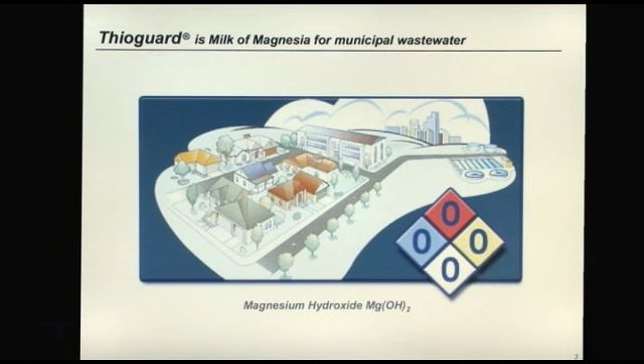The total system treatment concept grew out of the use of magnesium hydroxide for nitrification, when it was found that when added to collection, it could permeate through the system and provide benefits at each step along the way. As a consequence, Thioguard controls odor, corrosion, and fog while improving treatment. This section will deal with its reduction of corrosion systemically.

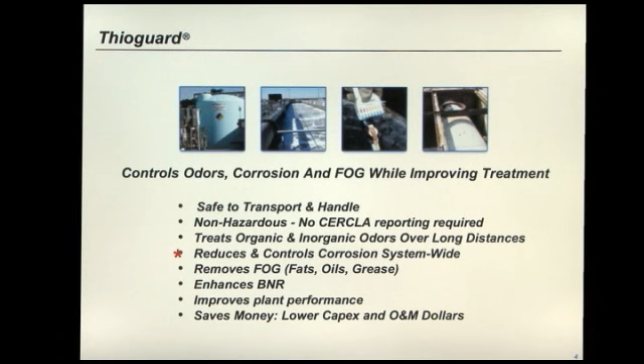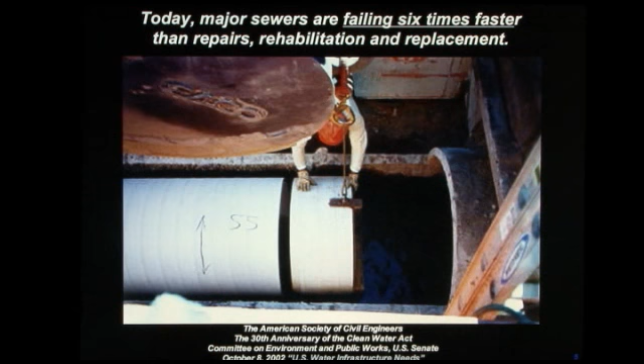Today, major sewers are failing approximately 6 times faster than they can be rehabilitated. Standard operating practices must change, and without change, approximately 50% of our major sewers will be in poor, very poor, or even inoperable condition by the year 2016.

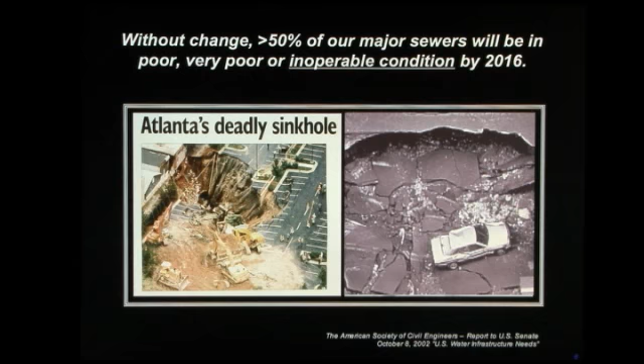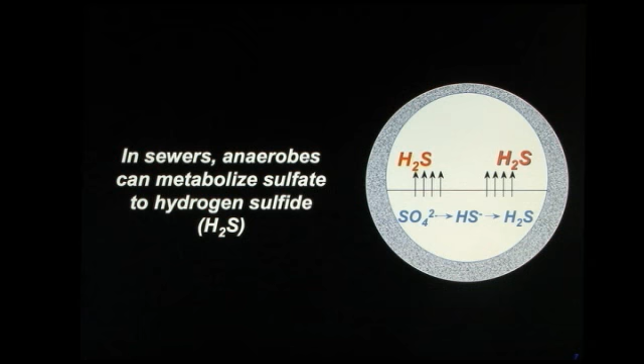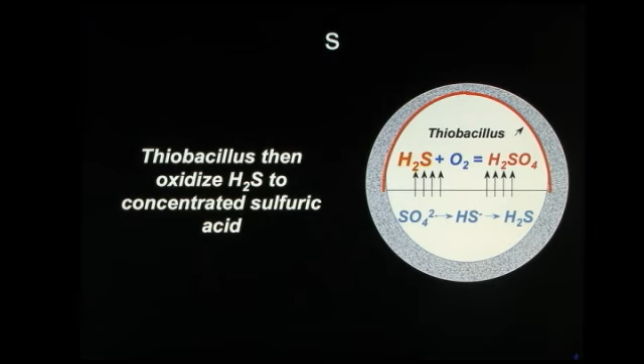In sewers, anaerobic bacteria can metabolize sulfate to hydrogen sulfide. Aging infrastructure is a misnomer. Most of the problems from sewer failures comes from acid attack. Thiobacillus oxidizes hydrogen sulfide to strong sulfuric acid, which attacks metal and concrete surfaces. Strong acid produced by this can reduce pHs to below 0.

Non-corrodable materials are far more expensive to use, and these materials still don't address the issues of odor and fats, oils, and grease. The problem has become very widespread. The question, though, is why is it happening faster today than in years past?

For example, in 1972, the Clean Water Act went into effect. These regulatory impacts have caused problems for wastewater managers across the United States. Reduction of metals corresponds to an increase in sulfide, and so does reduction of phosphates and an increase in sulfonates. Pretreatment, low-flow plumbing fixtures, and tighter budgets all contribute to difficulties for managers in charge of POTWs.

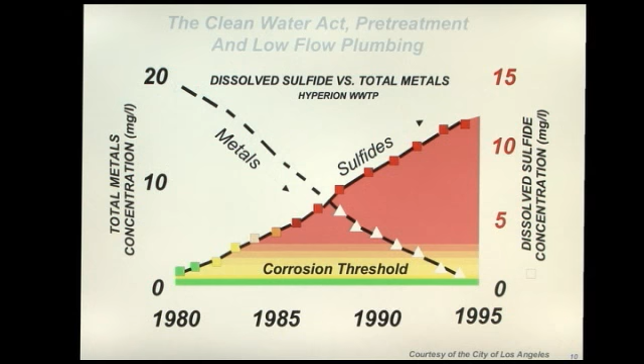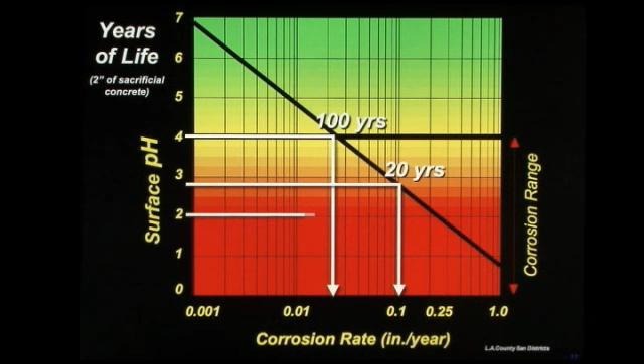Assessing the system can be simple and inexpensive. Measuring the surface pH of the infrastructure can provide useful information for managing your system. If the surface pH is 4 or higher, the useful life of the system is about 100 years or greater. If that pH falls between 3 and 4, the useful life is 50 years or less, and if it falls to as low as 2 or lower, that useful life will be 8 years or less.

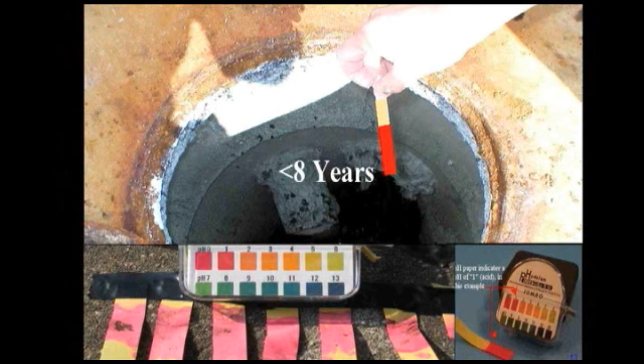A system map showing surface pHs and a graphic representation is a useful tool for managers. Each time confined space entry is done, it's recommended that surface pH be checked, recorded, and maintained.

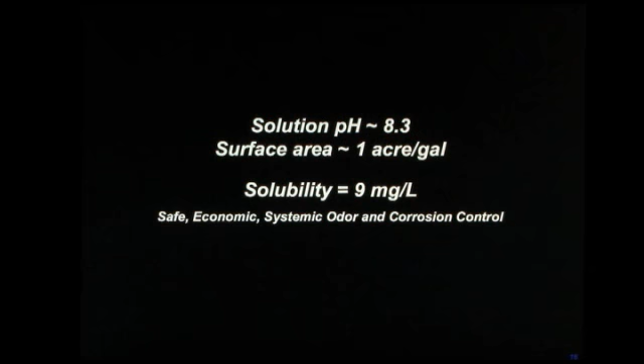Thioguard solves a wide range of serious wastewater challenges. Its solution pH is 8.3, and its surface area is nearly an acre per gallon. At a solubility of 9 milligrams per liter, it provides buffer capacity that can be used systemically. It's safe and economic. Adding Thioguard to the collection system provides a source of alkalinity that permeates through the entire system.

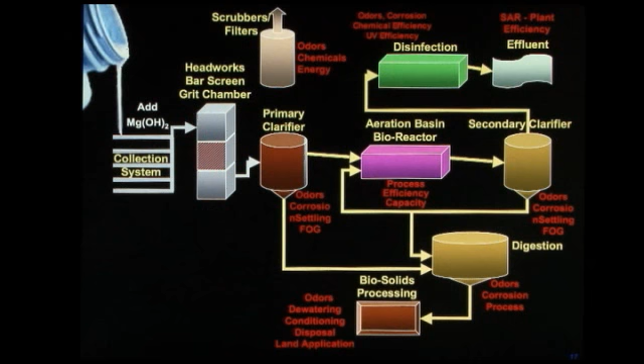Along the way, this solves the problems of odor, corrosion, and FOG. The same systemic treatment can be used inside the plant, but has most effect and is most economic when used outside the plant for odor, FOG, and corrosion, as well as enhanced water treatment, solids quality, and air quality.

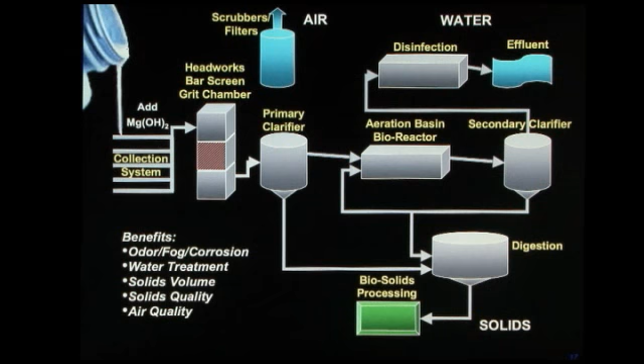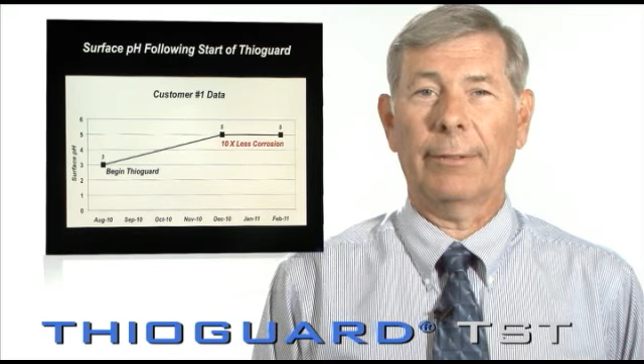Surface pH is a useful tool, and when Thioguard is initiated in the system, we often find that the surface pH, which was previously depressed, will increase. Within 6 months, the corrosion rate in this example fell by a factor of 10, and this is one of the worst cases. Thioguard reduces corrosion by increasing surface pH, but pH isn't necessarily the entire key to how Thioguard works.

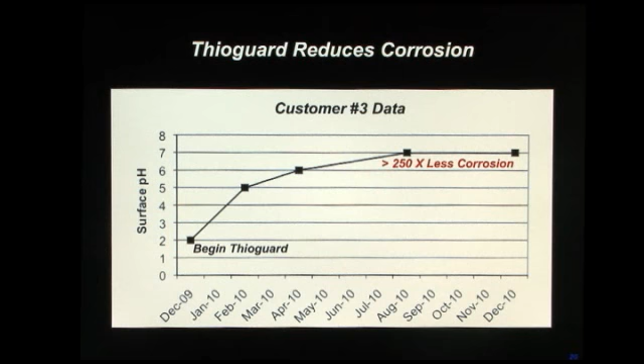For the purposes of this presentation, however, corrosion is the focus. The agency can decrease their corrosion rates by more than 3,000% if surface pH is increased a mere 3 to 6. And in this example, you can increase by 250 times the useful life of the system as a consequence of corrosion. This has real value in real dollars.

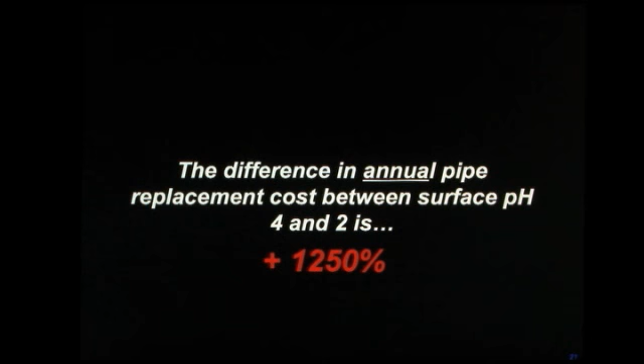When surface pH falls below 4, the life cycle cost assumptions are no longer valid. Odor control, elimination of fog, and improved treatment are values to agencies, and further benefits can be discussed in the videos that follow. But the difference in annual pipe replacement cost between a surface pH of 4 and 2 is 1,250%. As an example, amortized capital costs for major sewers are estimated to be over $100,000 per mile per year.

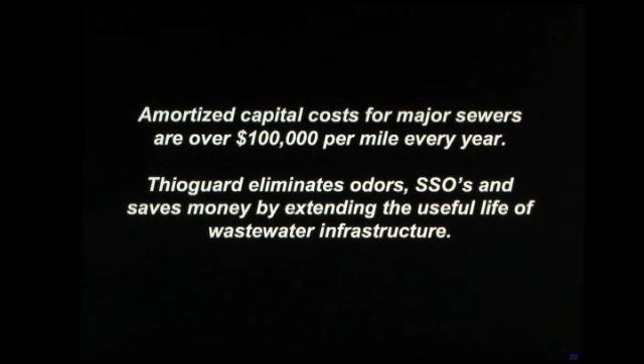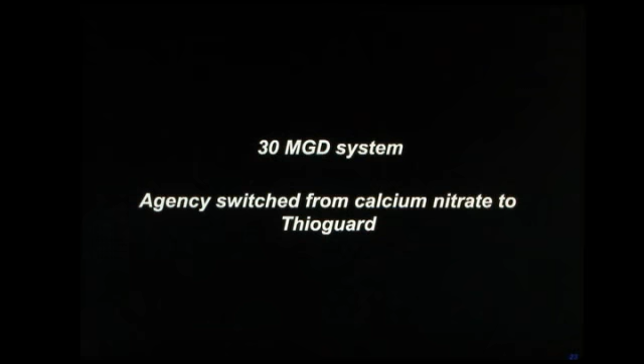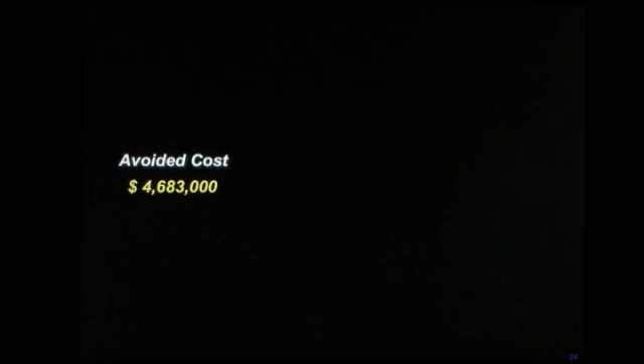Thioguard extends the useful life while eliminating odors, sanitary sewer overflows, and it saves money by extending the life of that system. As an example, we take a 30 million gallon per day system. The agency switched from using calcium nitrate to Thioguard, and the surface pH in a 6-month period increased from 2 to 5. The avoided corrosion costs alone were over $4 million. The cost of the Thioguard resulted in annual savings of over $3.3 million for this 30 million gallon system.

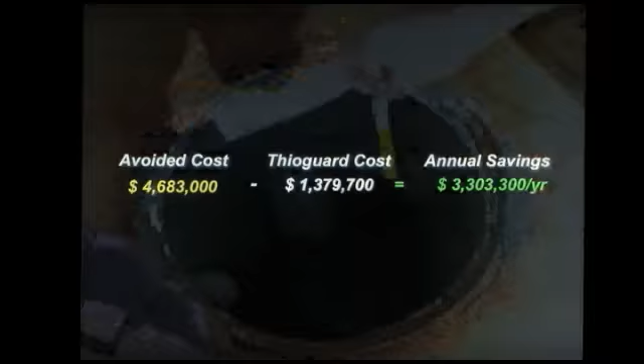Surface pH is a useful tool, and it can be used by management to both monitor and control the useful life of their system. What color is your system?

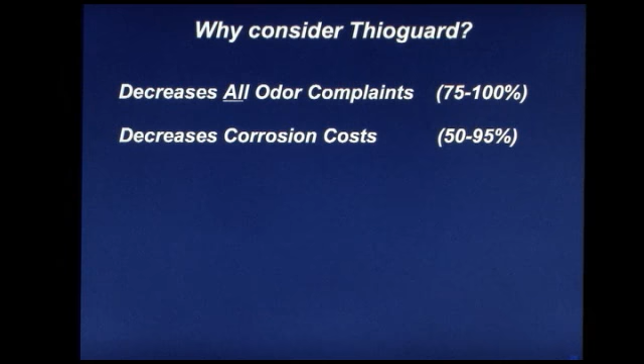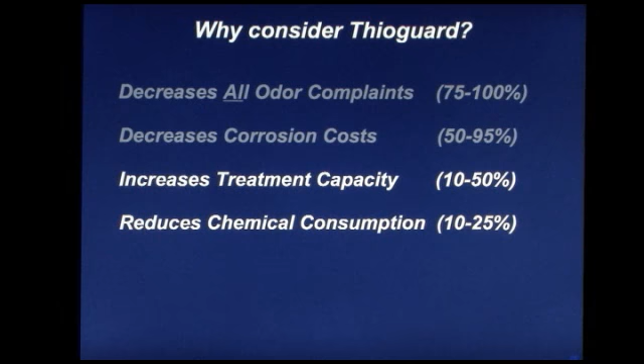And why should you consider Thioguard? Well, for one, Thioguard decreases all odor complaints, both organic and inorganic. In addition, as we've shown in this video, it decreases corrosion costs considerably. It also increases treatment capacity by 10 to 50%, reduces chemical consumption, reduces energy, and improves biosolids.